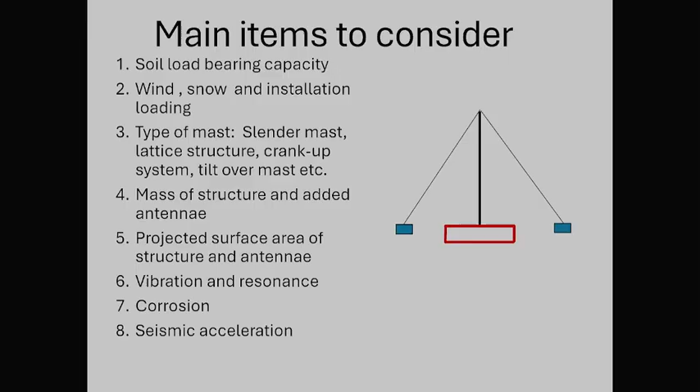So if you've got a massive beam, often these beam manufacturers will give you wind loading on this side and that side. You must take the worst case and allow for it all around your mast, because you're going to rotate it. So it sounds trivial, but it can be quite important.

Then vibration and resonance, very interesting, it's often overlooked. Corrosion, of course. Then seismic acceleration. Fortunately, we live in a very seismically quiet area. But if you are not, you must take that into consideration as well.

Okay, you must please stop me if you want to ask a question in between. You're welcome. I've simplified this. Can you see the cursor? Not. Show now? Not yet. It looks like I'll have to use this laser pointer. It's very dim. I hope you can see it. Can you see it? Okay.

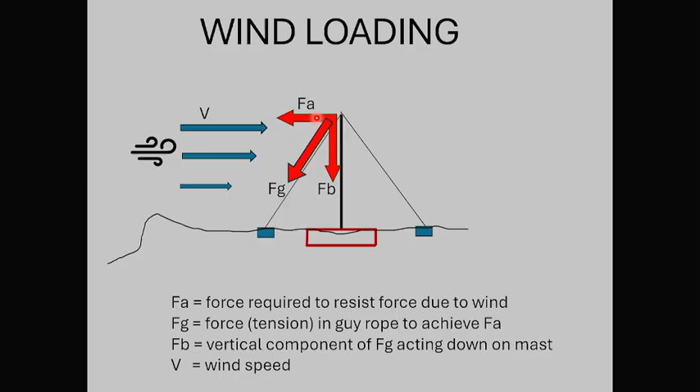In this case tonight, I'm going to assume it's constant, and I'm not even going to look at the distributed load, because correctly speaking, the load on your mast due to the wind will be a distributed load. It won't be a point load like I'm illustrating it here. But this is just to illustrate the principle. And if you design this way, you've got a good safety factor. So that's the basics of wind speed.

Now, if you take that wind to calculate the force due to the wind, it's this formula. It's very basic, and it's typically 0.6 times the velocity squared times the projected area facing into the wind. And that's basically half of the density of the fluid times the velocity squared. So it depends. If you're working on the moon where there's no gas, this will be totally different than at the coast. But basically 0.6 is a good figure to use.

This then times the area, which is the projected area in square meters, will give you your force A, this force A here. And that is what you need to resist the wind at that particular velocity. Obviously, it's going to be different, as I explained, because of distributed load, and the wind's not constant all the way up. But this is easier to explain it this way. And then you've got your guy rope sitting here at this angle theta.

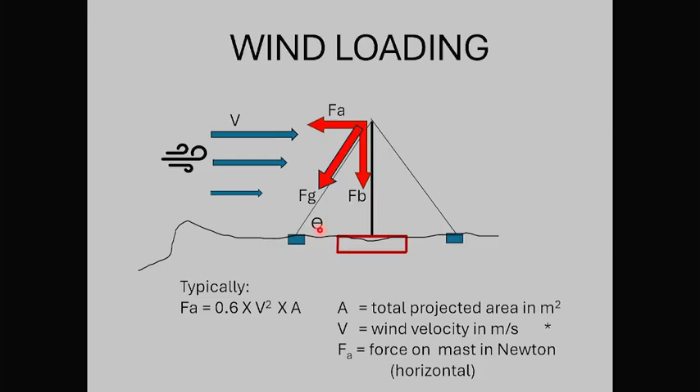So if you go and calculate now, you just have to resolve the forces, the components, because a force is a vector quantity. So you can do this with fairly basic geometry. If you take this force Fg in the guy rope, it's the force Fa, which you need to resist the wind, divided by cos of theta. You might have to check it. I might be wrong, but I think I have checked it. And then, of course, you can calculate that force.

And as a matter of interest, I just did a quick calculation. If theta is 60 degrees, if the angle of your guy rope is 60 degrees up, cos of theta is 0.5. So in other words, your force in the guy rope in this particular example will be double the wind force. So don't forget that. Then, if we now look at the force working vertically down on your mast, that's the other component of this force Fg in the guy rope. That is Fa times tan of theta.

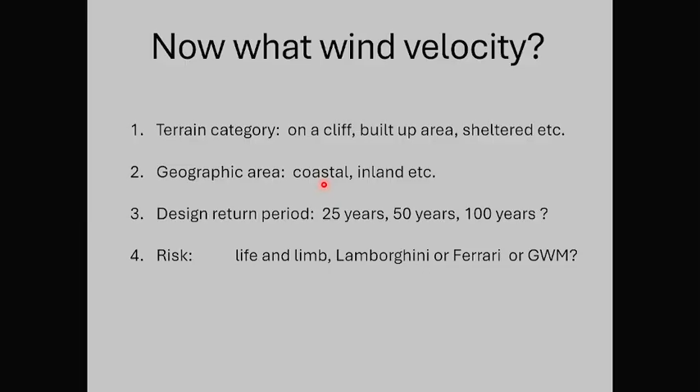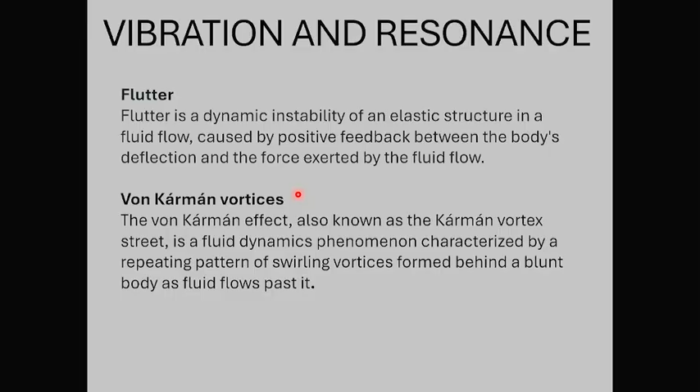If you have a structure in a fluid, here we talk about wind, usually on a uniform structure, the wind goes over it, and at the back it forms vortices. It sheds vortices around that structure. And the frequency of the vortex shedding, depending on the velocity of the fluid and also the dimensions of the structure, creates a certain frequency. And that then introduces a vibration, which can also destroy your structure. You've obviously heard telephone wires singing in the wind. That's usually caused by that.

Maybe you've seen it. I don't know if you've ever seen chimneys. There used to be one at North End Prison, next to the freeway. I don't know if you've ever wondered what those spirals are for. On this chimney, they had the spirals welded. I've asked engineers, and they said, no, that's a manufacturing thing. But that's not what they're for. It's to break the vortices.

And here's a good example. They call them strakes. You see them on aircraft wings, little things sticking out there. You wonder sometimes what those things are for, but they are to break vortices. And here's a good example, thanks to Wikipedia.

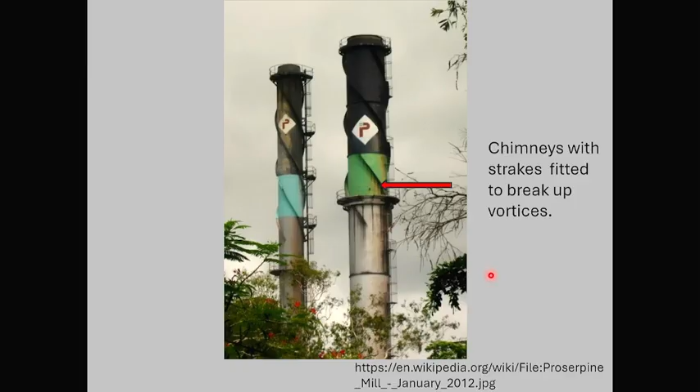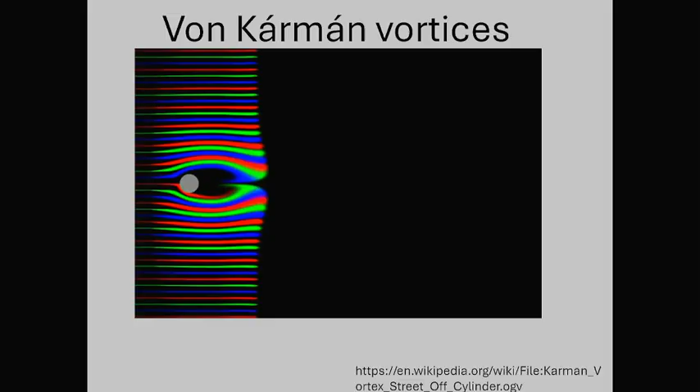Then, okay, this is an example, this is a simulation of what actually happens when you've got a uniform structure in an airflow situation. You see the vortices forming. Now every cycle there's a high and low pressure behind that object, and that's what causes your vibration.

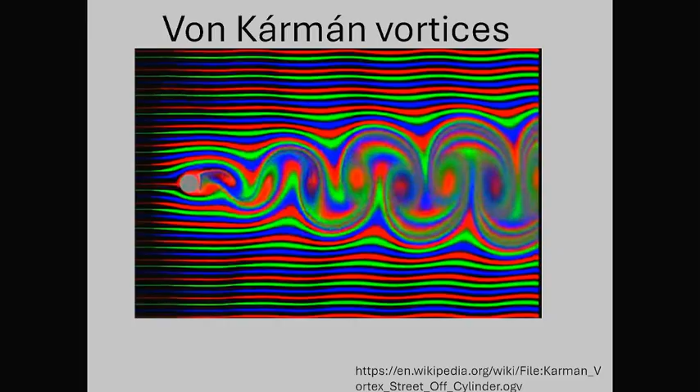And if that is in sync with the natural frequency of your structure, you've had it, because it'll then start vibrating by itself and it'll just self-destruct. So be aware of it.

A tapered mast is ideal in the sense that the dimension changes every millimeter. So the vortex shedding on a tapered mast is almost nil, or very insignificant, because it's a different frequency at each point. So let's say, for instance, the wind speed at that particular size will cause a vortex to shed, but just above it, the size isn't correct for that wind speed. So that's why you sometimes see tapered chimneys, because it avoids this issue.

Now, another very interesting thing is metal fatigue. My background's machine design, and that's quite a common problem. If you talk about presses that make millions of parts in a year, there's lots of metal fatigue there. And I've seen things break and people say, but how is it possible? It's so thick. I've seen shafts disintegrate, and they say, how can this happen? And it's usually due to metal fatigue.

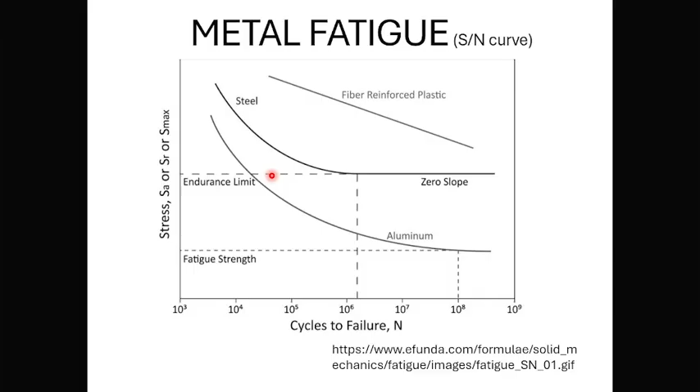Because on a tower, there's always wind movement. And we'll get to that later on, but the stress levels don't need to be very high to cause fatigue failure. So this is something also to consider.

Then, if you note, the previous slide didn't show a value for the stress on the SN curve. The reason is because stress concentration affects that value drastically under fatigue loading. So typical stress concentration factors are holes, welding defects, corrosion, lack of penetration in your weld, dirt or slag in your weld. So a little scratch on very critical parts can cause fatigue failure.

For instance, what I've seen in industry, certain metals are not weldable. Like EN8 is not a weldable steel, and it's a common axle steel. People use it for everything, and then they wonder why their shafts fail. It's because the carbon content is too high, and they weld on it, and that weld has a minute crack. And that's where the fatigue failure starts, and within 6 months, the shaft fails. So be careful on your material selection and where you weld and how you do it.

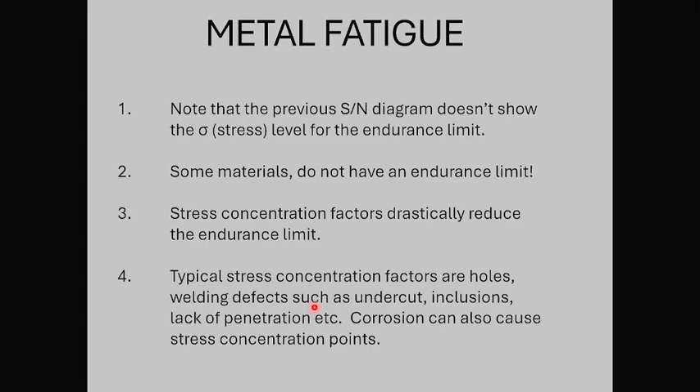This is now typical stress concentration factors from my ancient old textbook. Let me enlarge that a bit. If you look at this, this is now just a plate with a hole in it. If you look at the difference, this is the stress level. There's your normal stress at this low point here.

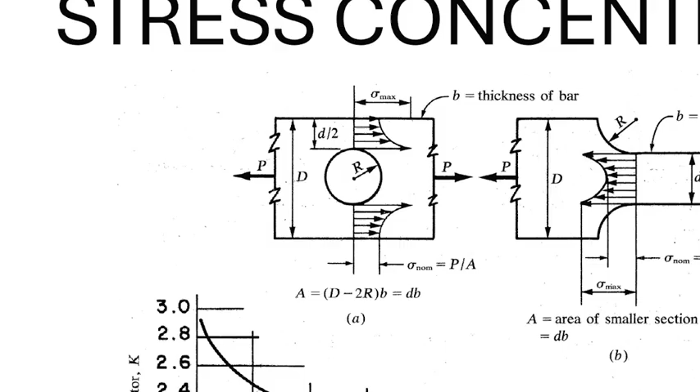What happened? Oh, maybe the cursor doesn't work there. Do you see this? No. But okay.

Okay, the cursor doesn't work there.

If you see, there's your normal stress, but if you look at that bigger one, there's your maximum stress, and that's all due to your stress concentration, in this case, this hole. If you look at this graph, circular hole, your stress concentration factor is 2. Doesn't matter what the ratio is.

Obviously, if your hole size to your material size is much bigger than the actual material, you can see up here the stress concentration factor goes up to 2.83. But it doesn't matter then. Eventually, you can make your plate as big as you want to and your hole as small as you want to. It settles here at about 2. So immediately you've doubled your stress in your material by introducing a hole. So you've introduced a stress concentration factor that you must take into account when you do your calculations.

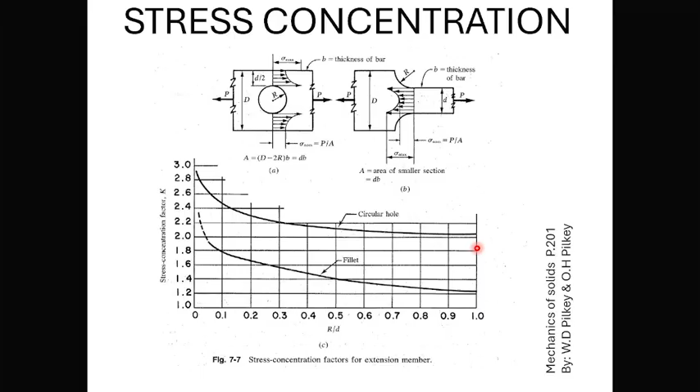Then a very interesting thing is stainless steel. This is a stress strain curve, and if you look at this one here, that's for steel, carbon steel. Now stress strain again is basically force related, and then the strain is your elongation over your original size. So as you apply force, your strain increases up to a point. If you look at this one here now, you're up to a point, then your steel basically breaks. The resistance disappears.

But look at stainless steel. See, there's two different types of stainless steel. That's duplex stainless steel. That's often used in the marine process industry. There's no what we call a knee. This just carries on and on and on. So you could have tightened your bolt, and you could still be tightening it, and you're already in yield. Yield means now this thing's going to fail any minute. But you're not aware of it.

So in the process industry, it's not allowed. You're not allowed to use stainless steel bolts at all. If you go on, let's say, an offshore platform and you think, oh, I'll put a stainless steel, you'll be fired immediately. You cannot use stainless steel bolts for critical items. So be careful and be aware of it. I use them also because the normal ones just rust, but be aware of what you do when you're tightening them and what can happen.

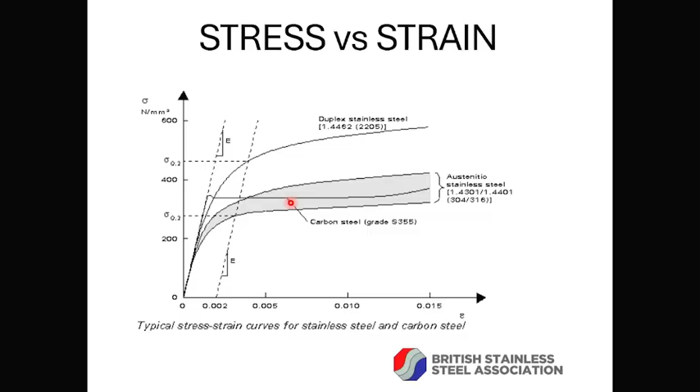It happens with aluminium, it happens with titanium, it happens with all materials that rely on that coating. Like stainless steel is only corrosion resistant because of the high chromium oxide layer. And those layers interact with each other on the nut and the bolt, and they actually bind under load. And you can't get them off.

Those bolts, I have a box of them, came off a water installation where the flange leaked, and you couldn't tighten up the flange. Because of that, they had to cut them off and replace them with proper bolts. Now, what do you use to prevent that? Teflon. Nickel anti-seize. Oh yeah, but no copper. Yes. But I must just say, yes, I use that as well, but it's not a guaranteed solution. Be aware of it. It does help, but it's not guaranteed.

Okay, that's about stainless steel and your yield point, which is quite important to bear in mind. Now, we're almost at the end, so relax.

Buckling. I don't know if you've ever seen steel beams in a building that's failed. But it's quite interesting to look at them because you think, okay, this beam was loaded, the load is downwards, but why is it like this? Generally it's got a twisting bend in it when it fails. Depending, you get different failure. You get hundreds of failure modes, but this is now

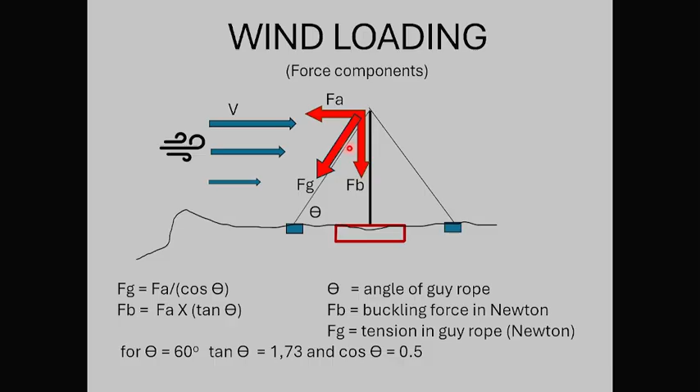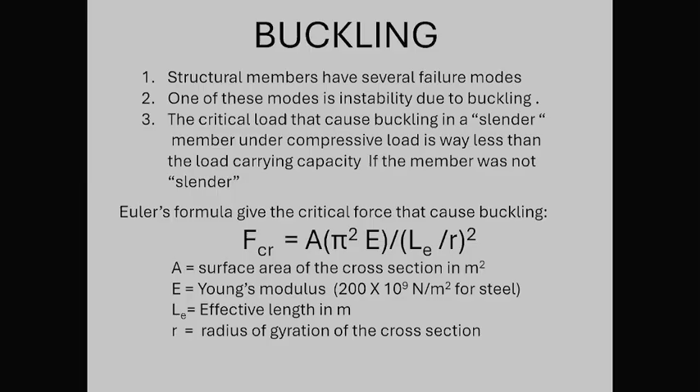Okay, this is the same. This LE over R is known as the slenderness ratio. For steel, that should be greater than 90. If it's greater than 90, you should look at this formula. Now, I'm sure if you've got a 6-meter mast, even a 5-meter mast, it'll be less than 90. But you can calculate that.

So, a stupid question. Would that be why it is not a good idea to build a mast out of angle iron? Are you talking about building a lattice structure or just a single iron? Lattice structure of angle iron. Angle iron's fine, you can build a mast from it, but it's not the same in all directions. Your moment of inertia that you use in your stress calculations is different at different positions. It's got the buckling component as well. It will make a big difference because your radius of gyration would be smaller on an angle iron.

We can look it up later on. You can calculate it actually; I've got to look at the book. So your radius of gyration is more than likely very small, and if you look at your formula here, you're dividing by it, which reduces your critical stress. You're dividing this term by this factor here, which will make it smaller. Does that make sense? But on the other hand, it's also not uniform, and I'll tell you, to climb an angle iron mast is hell on your feet.

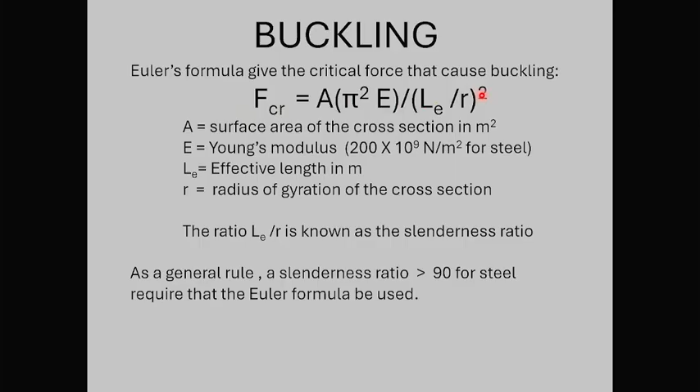Okay, if we then look at a typical freestanding mast, again simplified, I haven't shown the distributed load or wind forces at different velocities, but if you look at equilibrium, that means the mast will just stand still. You take the force due to the wind times the height of the mast, that moment, simplified as all applied at the top, just for the sake of the exercise. We then take the mass of your concrete base plus the mass of whatever you add, your tower or your antennas, times that distance. Because remember, the wind wants to topple this thing over. And what's going to prevent it? It's that weight you've got at the bottom.

So for equilibrium, the force times the height must equal this force due to the mass, times that length. Now, I've seen the tendency for a lot of people to dig a deep pit and they say, ooh, that's a good base. Now, this is purely my opinion. I don't think that's a good idea, depending on your soil conditions.

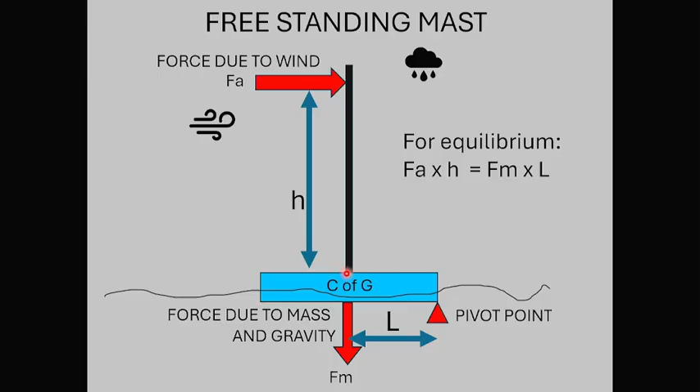To solve it, I brought my neighbor's little Caterpillar. He brought it to me the Saturday morning, and by 2 o'clock that's where it was. If you go and walk there now, you can't believe it. It's solid. So be very careful. The road is still there at the moment, but that's what happened. We worked until 9 o'clock at night to get it out. So just be careful with your soil conditions. It can be very treacherous.

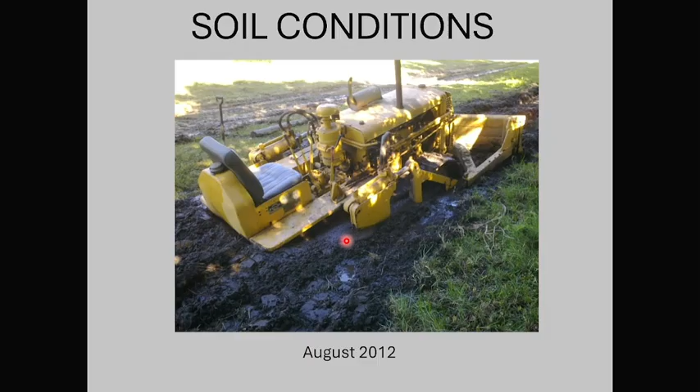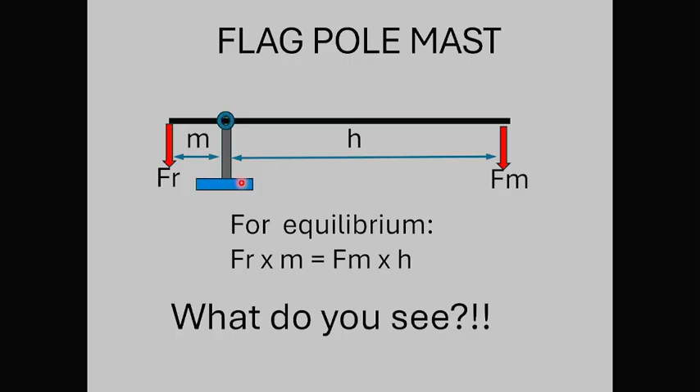Okay, any questions? Anything on the slides you would like to look at again? Anybody loosened that nut yet?